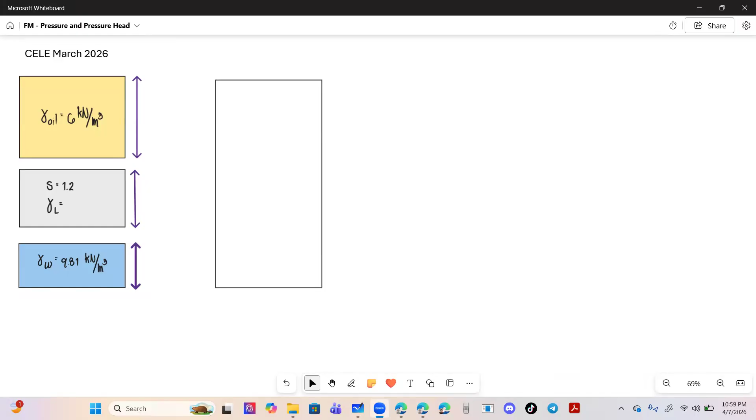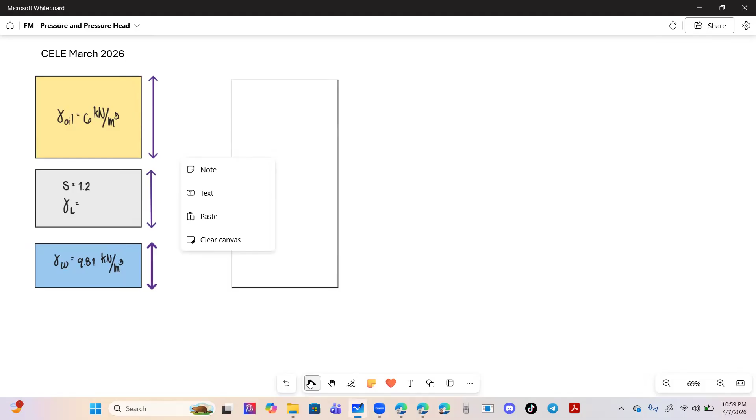So an oil with a 6 kilonewtons per cubic meter. So ayan, unit weight yun, kilonewton per cubic meter. Okay. So again, an oil with 6 kilonewtons per cubic meter is poured in a tank to a depth of 7 meters. Sige, ilipat natin to. Pinur to dito. Ayan. So, to a depth of 7 meters. So, lagay natin 7 meters. Type ko na lang. 7 meters. Okay.

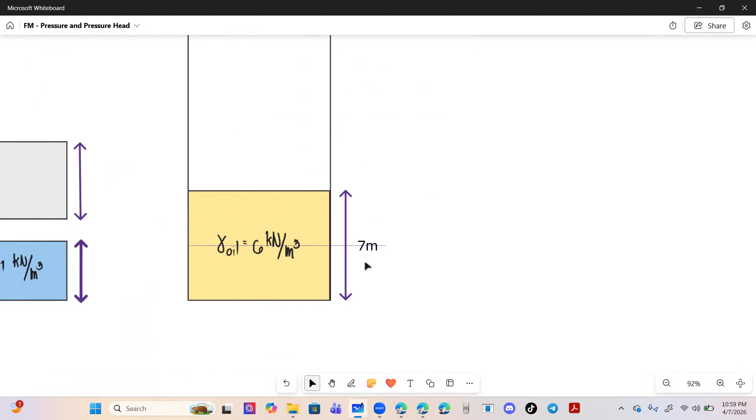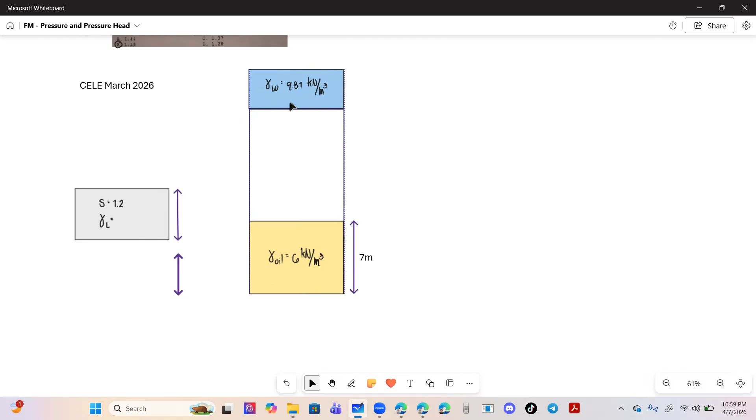And water is being added, which makes a depth of 10 meters. So, may dinagdag na tubig. Nag-pour ulit ng tubig. Ay, di ko nasama to. Sunod-sunod na pala to eh. Kasi magkasama to. Hanggang dito lang dapat. Ulitin ko lang din pala. So, again, water is being added which makes a depth of 10 meters na. Total yun, matic. So, ibig sabihin, 3 meters pala to.

Okay. And then lastly, a liquid with a specific gravity of 1.2 is also being added to the tank to a total depth of 12 meters in total. Okay, so nadagdagan to ng ilan? Dos lang. Tapos ganyan kalaki niya. 7, 8, 9, 10 plus 2. 2 meters yan. 11, 12. Ganyan.

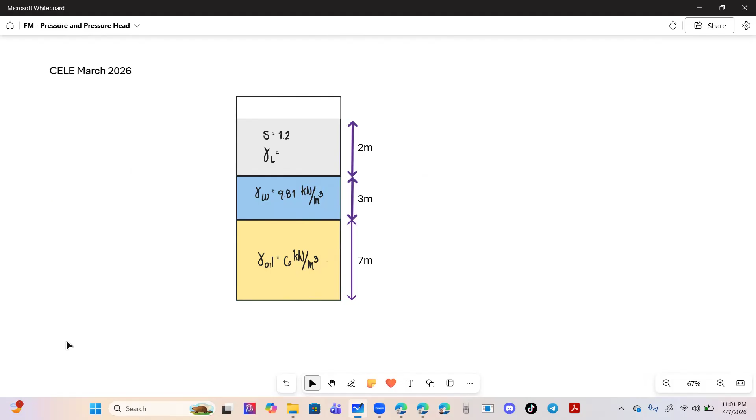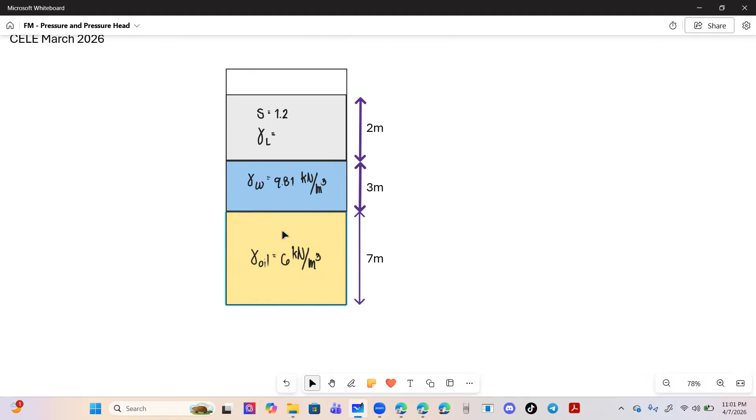At tinatanong, okay, calculate the pressure at the mid-height of the bottom liquid. Yeah, mid-height ng bottom liquid. May binabasa kasi ako yung sa comment. So ayun, mid-height ng bottom liquid. So, take note na kapag ganito, concept to ng ano eh. Similar din to sa lumabas, yung alin ang pwede most likely mag-float, di ba? Doon ka sa mas mataas na specific gravity or density, weight density. So, yung pinaka-dense nito, yung densest, papailalim yan after some time. Or agad-agad ba yun? Yung iba, magte-take some time eh.

Magsisettle yun. Okay, so ito, unit weight ng liquid, ilagay nga natin, since naka-unit weight ng oil to, unit weight ng water. Nilagay ko na, naka 4 degrees Celsius kasi yan, kaya 9.81. So, kung naka 20 degrees Celsius tayo, yun naman yung 9.79, di ba? So, to get the specific unit weight ng liquid na yun, at ito, 1.2, parang glycerin, mga ganyan na nagre-range. Be familiarize sa mga specific gravity ng common liquids. Alcohol, oil, glycerin. Discuss natin yan sa other video, no? Sa fluid mechanics, yung introduction sa fluid properties. Gagawan ko yun. Ito parang glycerin to, 1.26 ata yung glycerin eh.

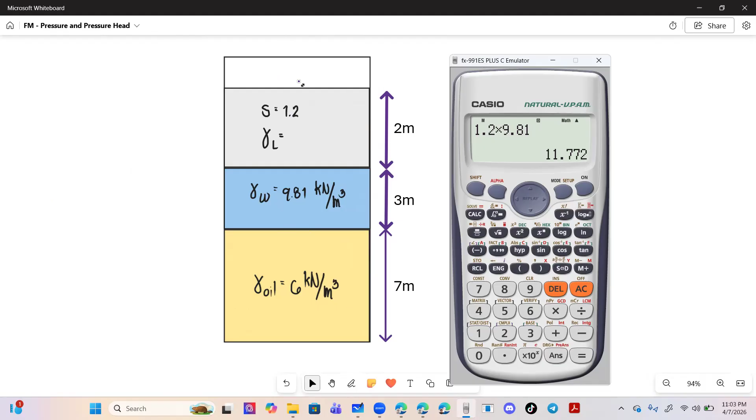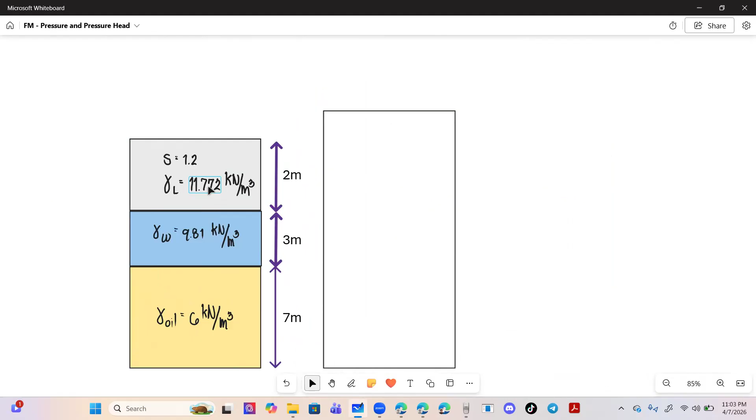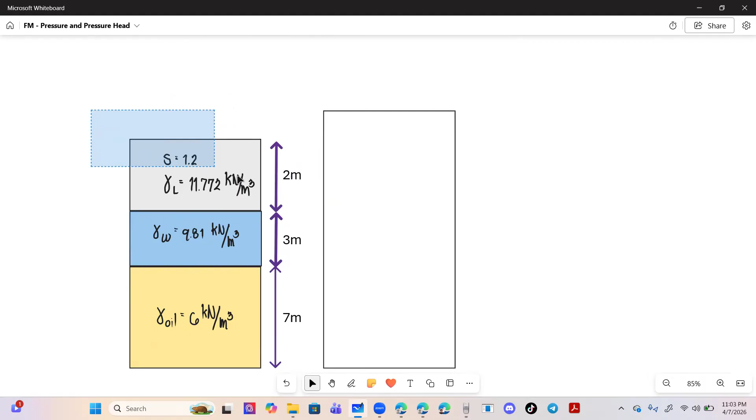So ayun, medyo malapit naman doon, no? Baka doon nagre-range. So times unit weight ng water, 9.81, di ba? So that is 11.772 kung ilagay natin. Ilalagay natin yung value, 11.772. Tama, 11.772. And most likely, yun yung magsisettle pala. Kilonewtons per cubic meter. Okay, so ibig sabihin kung i-duplicate, ayusin ko na lang to. Ta-transfer ko siya dito, so after some time magsisettle yan, may pinakamalaking value ng unit weight or weight density, 11, tas 9.8, tas 6. Baliktad lang pala. So, mauna pala to. Ba't di ko makuha yung 2 meters? Ayun, mauna to, magsisettle to, pinakababa. Tapos yung water. Tapos yung oil na. Ganyan na yung arrangement nila.

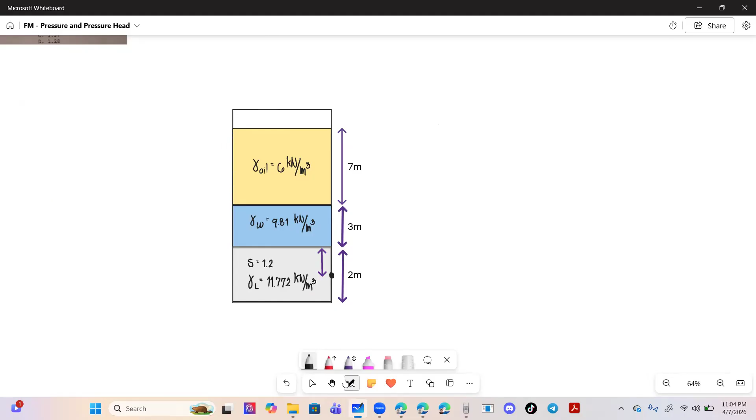So, ang pinapahanap is yung pressure daw at mid-height ng bottom liquid. So, dito yan. Kalahati yan, syempre. So, kung mid-height, 1 meter to, 1 meter to. Pero di na kailangan natin yung baba. Kahit yung taas na lang kasi magsa-stop naman tayo dun eh. So, 1 meter. Paano yan? Yung process niya, yung principle of hydrostatics na lang yan. Principle of hydrostatics, summation ng pressure lang yan. Summation ng pressure, or yung pressure at certain point na lang. Okay, yung pressure at certain point, okay na yun?

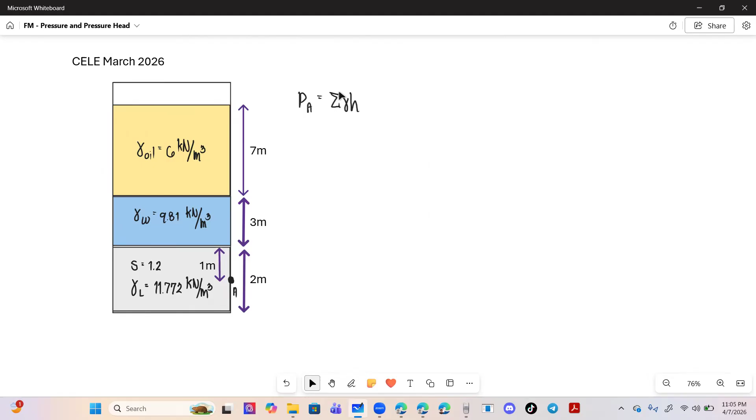Sige, pangalanan natin point A to. Pressure at point A is simply summation lang yan ng gamma H. Marami tayong ways pagkuha nito. Pwede mo rin kunin yung pressure sa center of gravity. Pero ito pwede mo rin gamitin yung head, co-convert mo rin siya. Pero in this case, mas madali yung paggamit mo ng head kapag kunin mo yung hydrostatic force. So pressure lang naman to, ito straightforward na tong gamma H, di ba?

So 6 times, store ko nga to para di ko na i-type. Unit weight, nasa Y, mukhang Y kasi yung gamma. So 6 times 7, plus gamma H. Pressure na yan dito, nandito ka na, gamma H. Plus pressure naman ito, pababa. That will be 9.81 times 3. Sunod, gamma times 1 na lang yan. Plus gamma, 11.772 times 1 na lang yan. Sinulat ko talaga yung 1, no? So, ayan, 83.202.

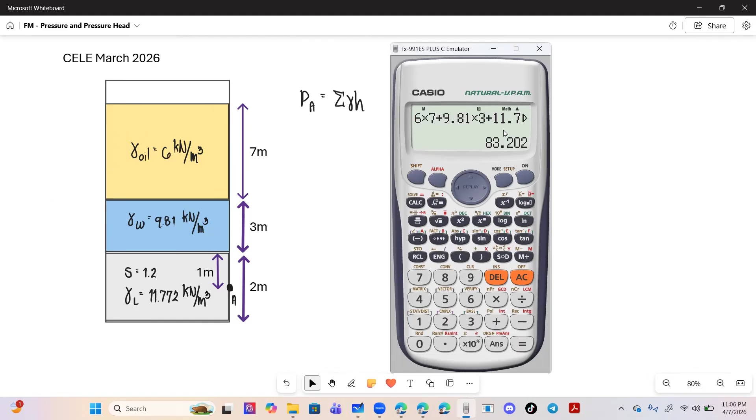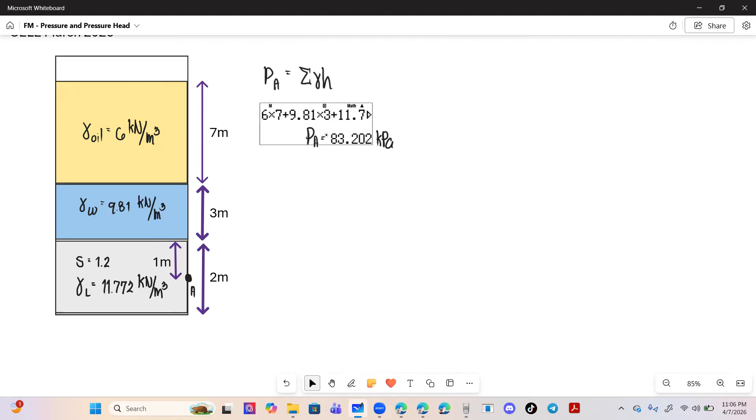And that's it. Lagay ko na lang yung answer. 83.202. And that is pressure yan. So, di ba, kilonewton per cubic meter times mo sa meter, that will be kilonewton per square meter or kilopascals. Kilonewton per square meter ay kilopascals. So, ayan yung pressure at point A. Pinangalanan natin. 83.202 kilopascals. So, ayun. Yan lang. That's it for this problem. Hope you learned something. Thank you.